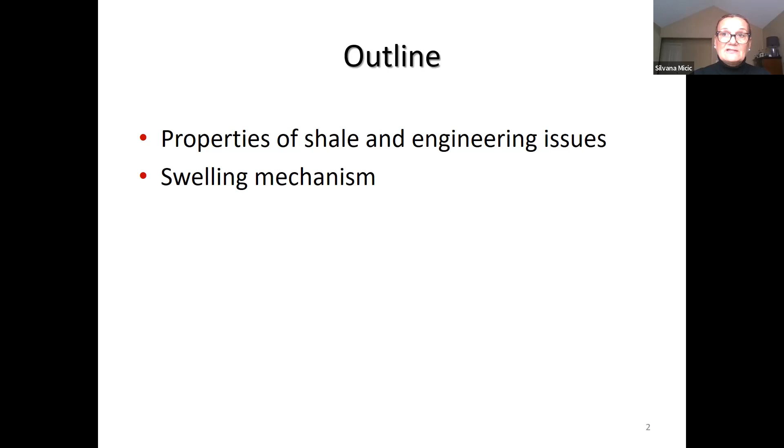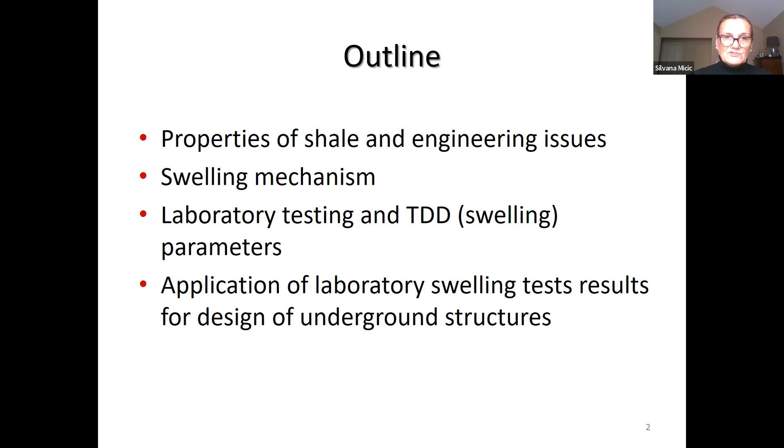So the outline of the presentation today: I will talk about properties of shale and engineering issues faced during the design and construction of underground structures in this rock formation. I will talk about swelling mechanism, explain why the shale swells. I will talk about laboratory testing and time-dependent deformation, which is the swelling parameters obtained from this laboratory testing, and then how these results can be applied for the design of underground structures. At the end, I will talk about one case history, the Billy Bishop Pedestrian Tunnel in Toronto, which connects the mainland and Billy Bishop Airport on the Toronto Island.

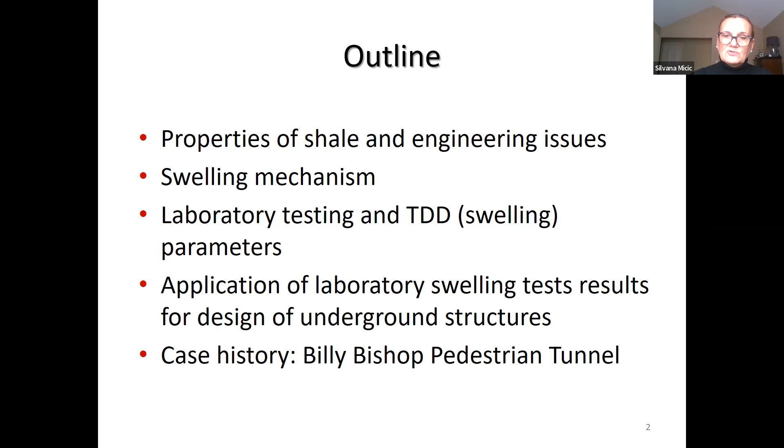So you guys are probably familiar with the geology of Ontario. We know that Canada is geologically one of the oldest countries in the world, and half of its territory is actually exposed Precambrian igneous and metamorphic rocks, which are 4 billion years old. In Southern Ontario, we actually have an unexposed Canadian Shield, where the Ordovician sedimentary rock, 500 million years old, sits on top of this Precambrian igneous rock. That Ordovician sedimentary rock consists of shale, dolostone, limestone, and sandstone.

Shale represents the accumulation of marine mud. This figure shows the geology profile in the Toronto area. You can see that in the Toronto area there is a Georgian Bay Shale, which is at the surface, and most underground structures in Toronto are placed in this Georgian Bay Shale. In the Niagara area, it's the Queenston Shale.

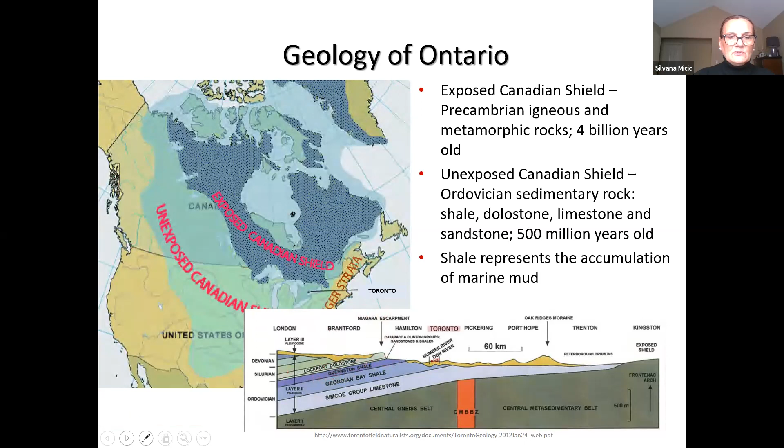The properties of these shales are that they are generally massive sedimentary rock with sub-horizontal bedding planes and relatively widely spaced or no vertical joints, and occasionally there are rubble zones at the weathered rock level. Usually the surface of this rock is very weathered. This rock is interbedded with layers of limestone and sandstone, and sometimes there are clay seams in upper levels.

This rock has locked-in very high in situ horizontal stresses. K0 could be 4 or even greater. This is relatively weak rock with brittle failure in unconfined compression. The rock has very low tensile strength, less than 10%. This rock is also characterized by high fissility and is susceptible to slaking and disking along the bedding planes upon exposure.

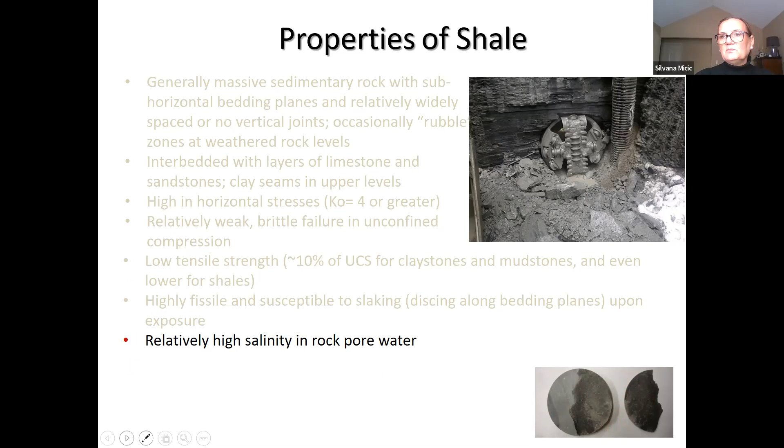In this photo, you can see the disking along the bedding planes. The rock also has relatively high salinity in the rock pore water. This is important later on—I will explain why it is important from the point of view of the swelling mechanism.

And the major characteristic of this rock is time-dependent deformation behavior upon relief of initial stresses. So when we excavate a tunnel or any structure in this rock, this time-dependent deformation behavior starts at the opening. Usually the vertical swelling potential is higher than horizontal, and the other characteristic is that this time-dependent deformation is highly stress-dependent. Later on, I will explain why these characteristics are important for the development of the methodology of investigation and design in this rock.

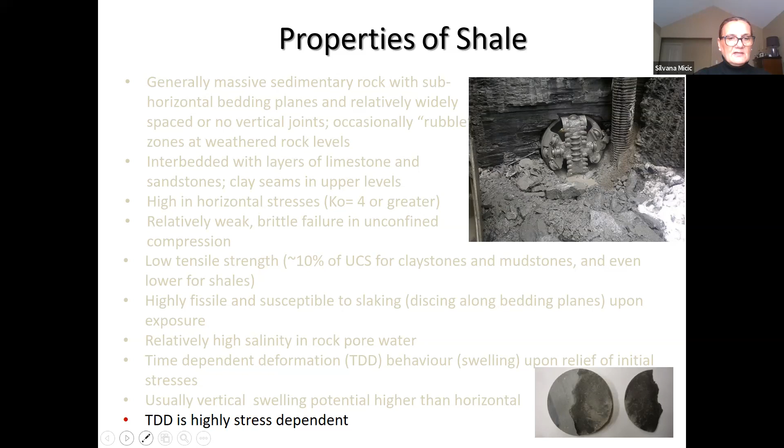These photos show Georgian Bay Shale cores recovered from the ground at different depths: 20 meters and 3 meters below the bedrock surface, and 500 meters below the bedrock surface. You see here it's a massive sedimentary rock with limestone interbeds. This is from the top, close to the bedrock surface, where usually this rock is weathered and some clay seams could be found. This core from greater depth usually is also solid initially, but when you bring it up to the surface, it just starts disking like this and behaves like this.

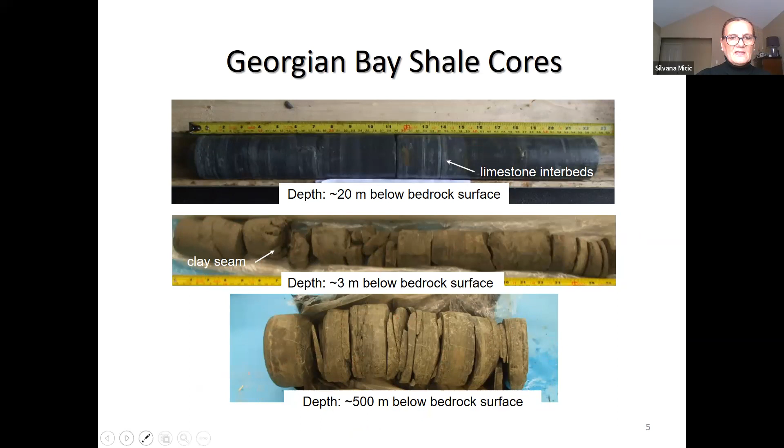So what is the problem here? What are engineering issues on excavation in this shale? It depends on the type of structure, could be open excavation or could be tunnels. It should be a short-term engineering issue during construction or a long-term issue during the use of the structure.

During construction in open excavation, we can see heave and buckling of the floor, and also movement along bedding planes. In the long term, beside these two movements, we can see long-term deformation in unsupported excavation, or stress increases in structure elements, potentially leading to distress. So if we have a wall, a joint adjacent to the rock, we can expect stress increases in the structure element, which can cause distress.

When we're talking about tunnels, tunnels are completely surrounded by rock, and during construction we can see movement along bedding planes at or near the spring line of the tunnel, then local failure at the crown and invert, or some invert heave. In the long term, depending on whether the tunnel is lined or unlined - if it's unlined, we can see displacement increase, invert displacement with time. If there is a liner, then we can see distress of the liner due to stress increase.

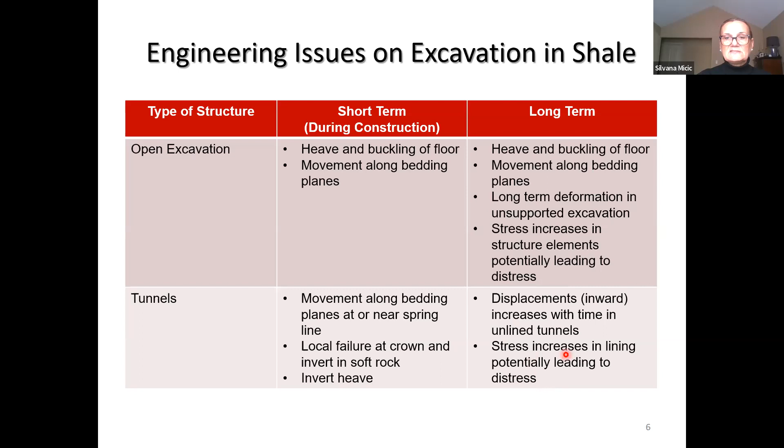So in the following slides, I have a few examples showing these engineering issues. One is heave of the excavation floor. You can see here how big that heave is, in the Dufferin Quarry after excavation.

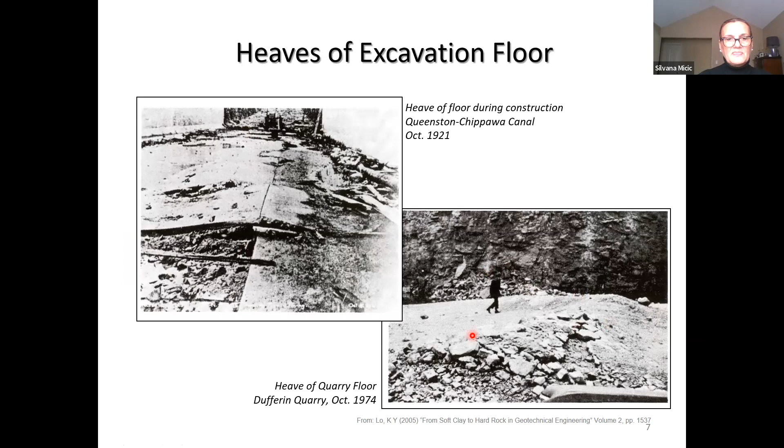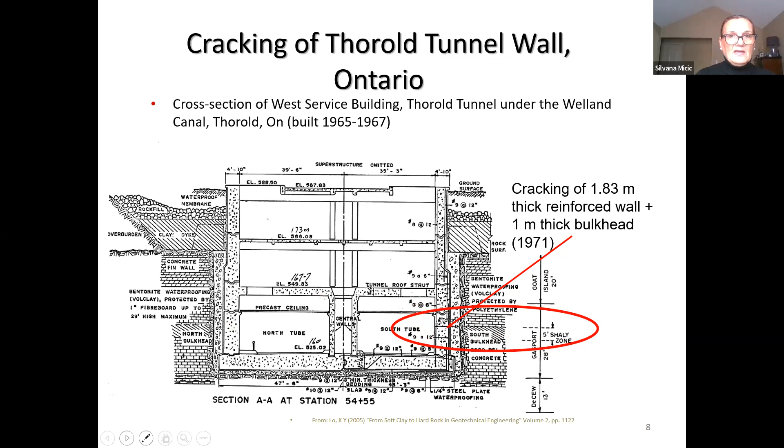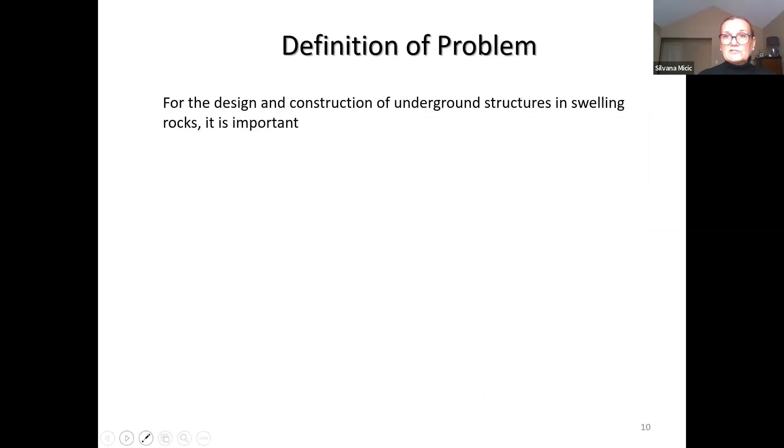So for design and construction of underground structures in swelling rock, it is important to understand initial stresses and time-dependent deformation behavior of the rock mass, and then to develop a stress-strain time relationship for the analysis of rock structure time interaction problem, and also to develop a strategy to address these issues in design. So that's the major thing - to understand this, and then to develop a methodology for how to analyze this rock structure time interaction problem.

Why does this rock swell? That's the question, because usually we know that clay swells if it has montmorillonite or other swelling minerals. As I said before, shale is actually cemented clay or mud, so the major particles are clay particles, but these particles in the Georgian Bay shale and the Queenston shale don't have any swelling minerals - no montmorillonite. So they were puzzled why this rock swells.

The easiest explanation is the process of osmosis and diffusion. When this clay was deposited and the rock formed over long geological time, salty water stayed captured in the pores of this rock, so the pore water in this clay, in this shale, is actually very salty. So when that rock gets in contact with fresh water, we have a process of osmosis - movement of ions from higher concentration to lower concentration, and movement of water molecules from higher to lower concentration.

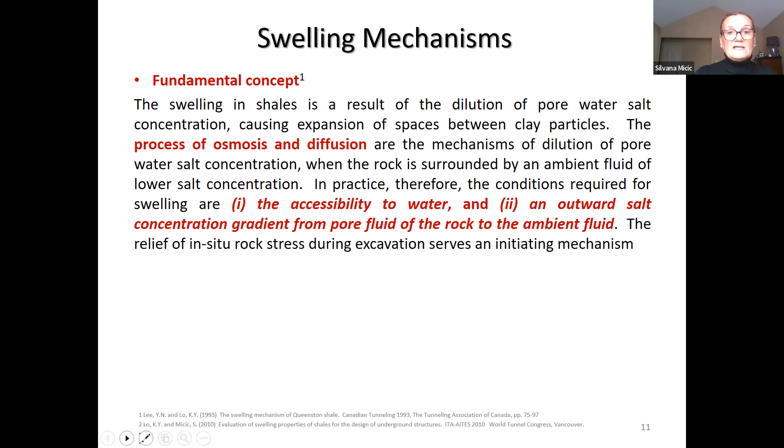On the other side, as I said, the shale is formed by cementing of clay particles, so from the soil it becomes weak rock. These clay particles are cemented with some cementing agent. Queenston Shale and Georgian Bay are cemented with calcium carbonates.

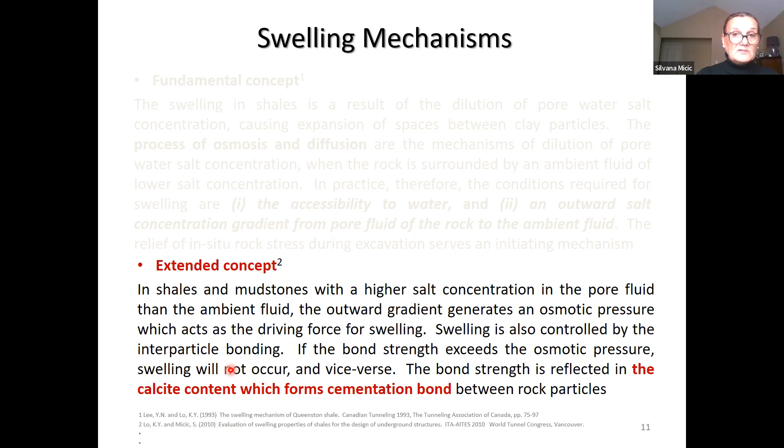If this interparticle bond is very strong, there is no swelling. But if it is weak, then this osmotic pressure is higher and we have swelling. So it's important to see what the calcite content is in that particular rock, which forms that cementing bond.

A methodology for investigation and testing of swelling properties of shales and shale formations was developed in the 70s after that problem in the Thorold tunnel. It was developed by Dr. K.Y. Lo from Western University, and since then this methodology has been adopted by industry and is used for design of underground structures in Canada and around the world.

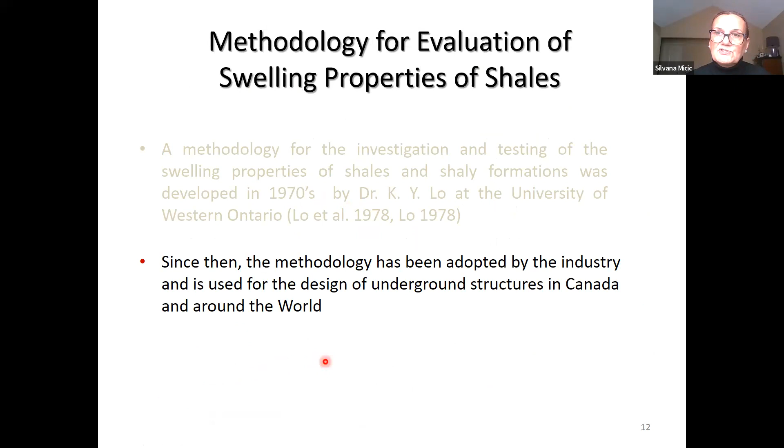If you work in Ontario, you are probably in Toronto. Tomorrow, as a geotechnical engineer, you will probably be involved in some underground structures, and if those structures are placed in these shales, you have to apply this methodology. It's almost become standard in this area.

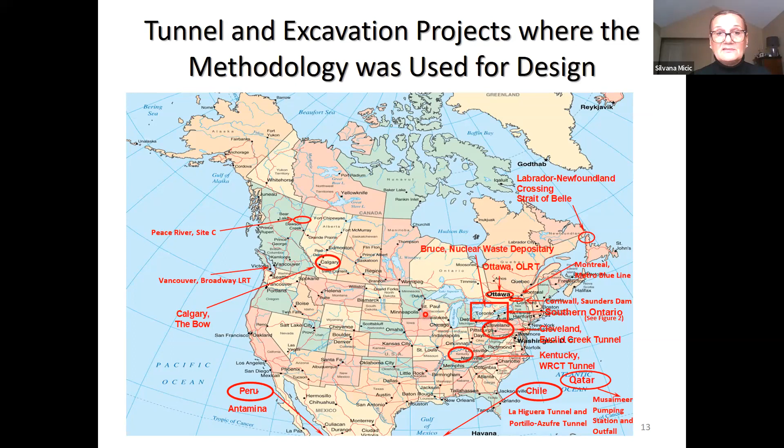This methodology includes two steps: site investigation and laboratory test. Site investigation is actually measuring, rock coring, and obtaining rock cores for testing, and also in situ stress measurement at the site. Once we have these rock cores, we do two types of tests: strength and deformation tests, and also swelling tests.

These parameters obtained from the strength tests we use to estimate stability of that excavation and to propose some support if it is required.

The rock cores obtained from the ground are subjected to swelling tests, and then using the parameters obtained from these tests, either using a Lo-Yuen model or Lo-Hefny model, we can predict some behavior of that particular rock at that particular site.

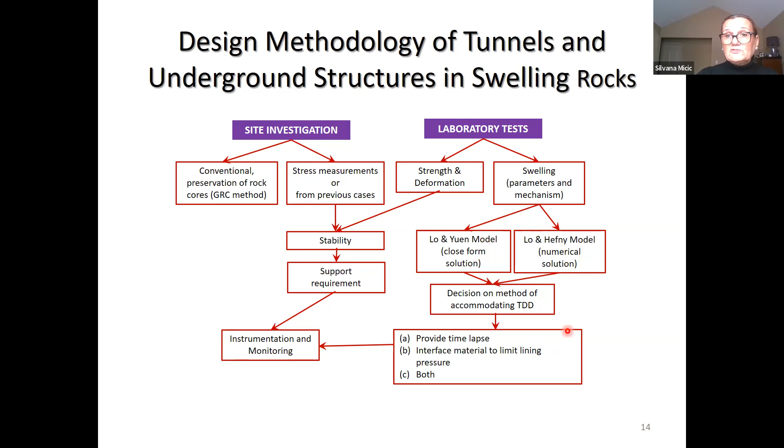Once we have that, we can make some kind of decision on the method of accommodating time-dependent deformation. I'm going to talk in this presentation more about these parameters to obtain, these design models, as well as a method for accommodation of time-dependent deformation.

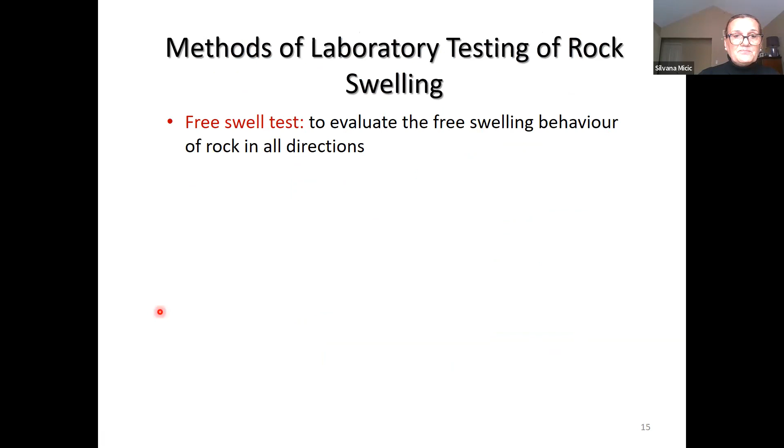The method of laboratory testing of rock swelling includes several tests. One of them is the free swell test, which is designed to evaluate free swelling behavior of rock in all directions. The second test is the semi-confined swell test, to evaluate the stress-dependent swelling behavior of rock, because this swelling behavior is actually stress-dependent.

The third type of swell test is the Null swell test, which is designed to measure the critical pressure required to completely suppress swelling of rock. What does that mean? If you have your structure, a tunnel liner for example, directly on the rock, because the rock swells, it exhibits some critical pressure, putting pressure on your structure, and using this test we try to measure that suppression pressure.

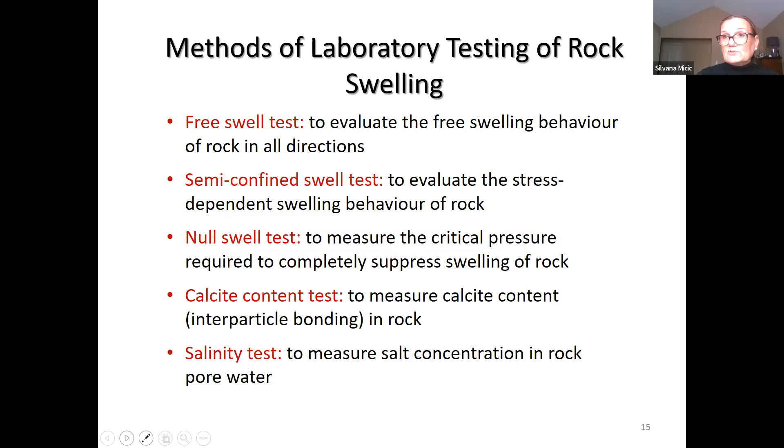Besides that, we of course measure calcite content to explain the mechanism of swelling. If the calcite content is high, probably that rock doesn't swell. We measure a salinity test to measure salt concentration in rock pore water, that's the method test we apply.

Now I'm showing you how we get the samples for these tests. This photo shows, as I said, the rock cores should be cored from the ground using the rig. This is actually the Billy Bishop site when we recovered Georgian Bay Shale for testing for this particular project.

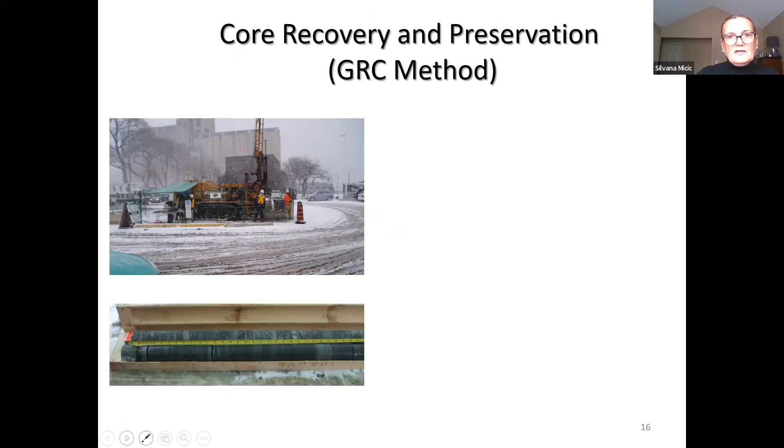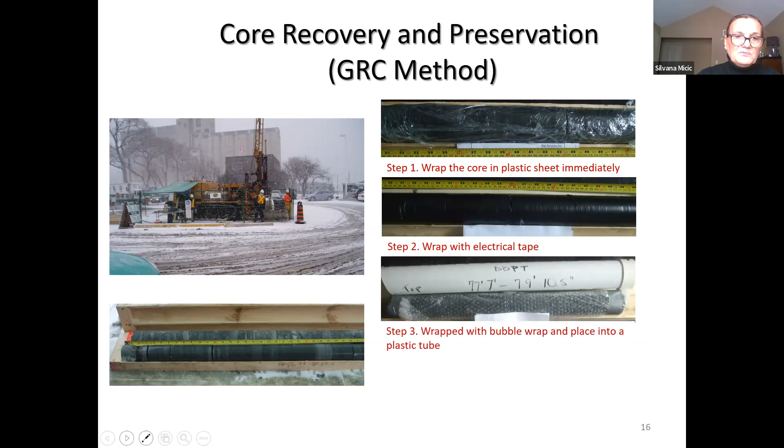What is important for this lab test is that we have very well preserved rock samples. We created some steps on how to preserve it, to be sure that the sample preserves its natural moisture content, so it can be usable for this kind of testing we developed for design of structures in swelling rocks.

So these are the steps, and tomorrow, if you are a geotechnical engineer and you're recovering your samples, you need to preserve them. You need to send the samples for testing, swelling test. You have to follow these steps.

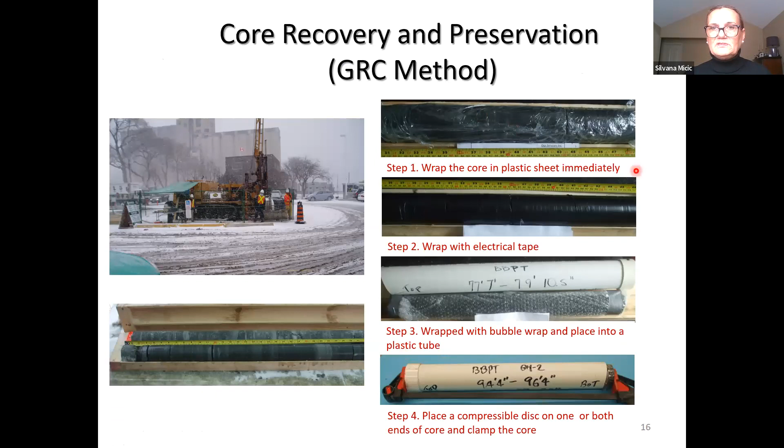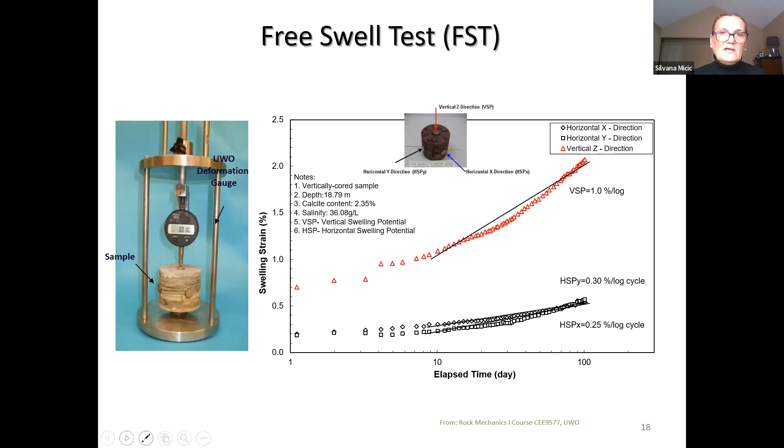The other test is semi-confined swell test, where we also have a sample and we submerge that sample in water, but the sample is stationary, and we put some frame where we apply some load. So we apply some pressure to this sample specimen, and then we monitor swelling strain, changes in strain.

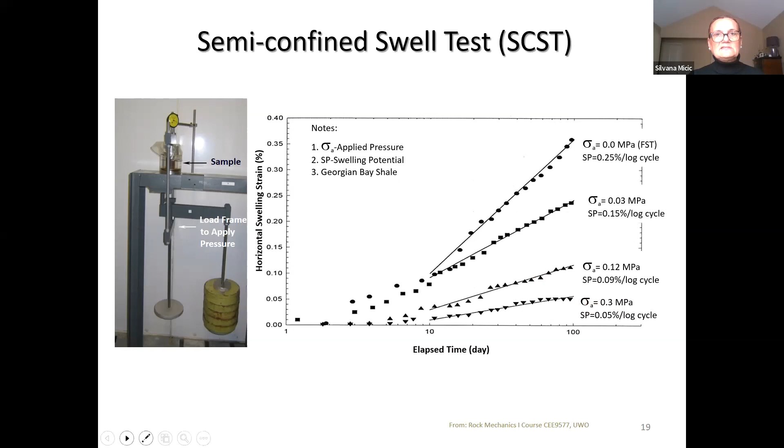What we're doing here, we don't allow the sample to swell. The sample itself tries to swell and to push this, and we capture that push of that force on this load cell. With these gauges, we actually monitor that there is no movement, just the pressure. So the results of this test are presented here.

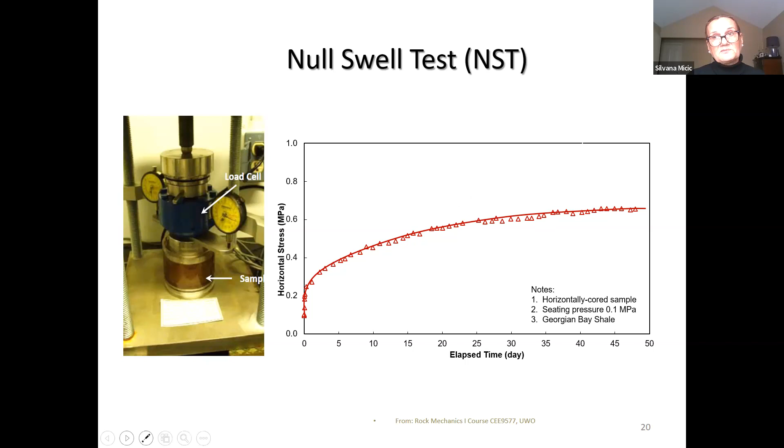So what does that mean? That this rock applies 0.7 megapascal on the structure, which is huge. What does that mean? If you have a tunnel liner, you have to accommodate, you have to design your liner to this, then your liner is going to be very thick, very expensive, so nobody likes that.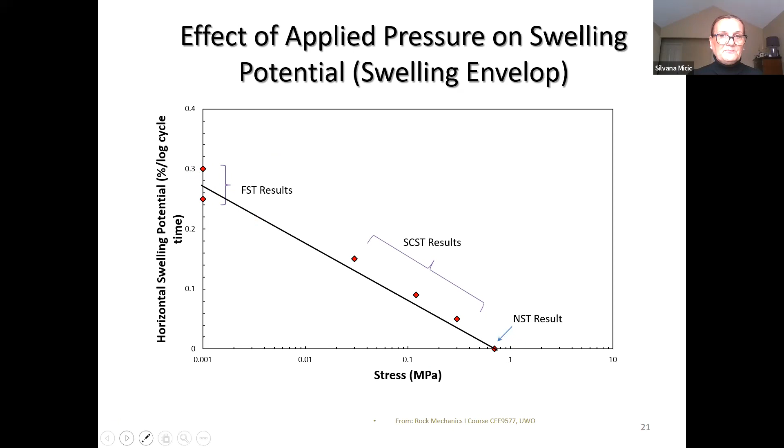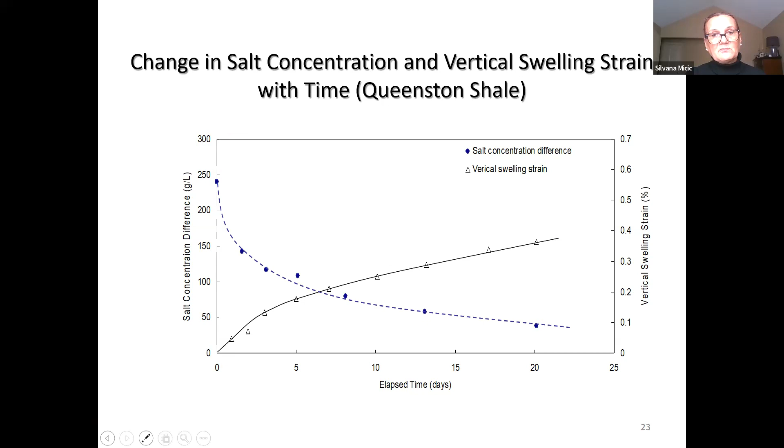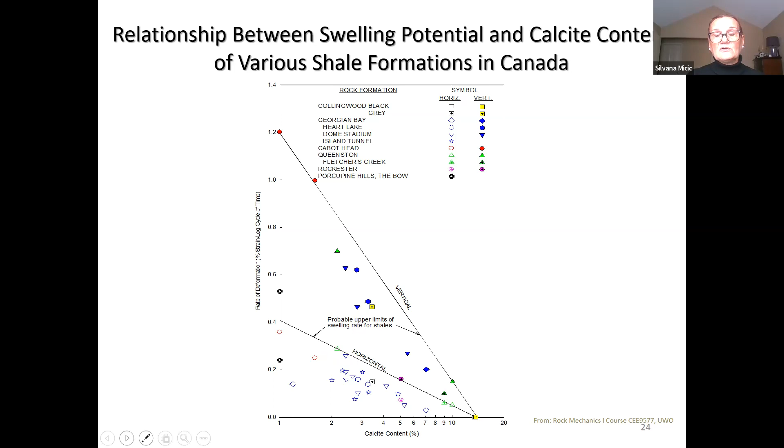Then I also showed in the other slide where I'm showing swelling potential versus calcite content, percentage of calcite content. You can see if the calcite content in this rock is higher than 14%, there is no swelling. So the rock will swell only if that calcite content concentration in that rock is low. This is the balance between osmotic pressure due to high salinity and this concentration of calcite content. That's why we measure these two properties as well on the sample before and after the swell test.

From these tests we have parameters and methods for tunnel design in swelling rock. One method is the Lo and Yuen model, a viscoelastic closed form solution for a concrete lined circular tunnel in swelling rock, developed by Dr. Lo and Yuen in 1981. In this model, the time-dependent rock-structure interaction is characterized as linear viscoelastic behavior using a single Kelvin element, employing time-dependent parameters obtained from the swell test. I will talk about this model more later.

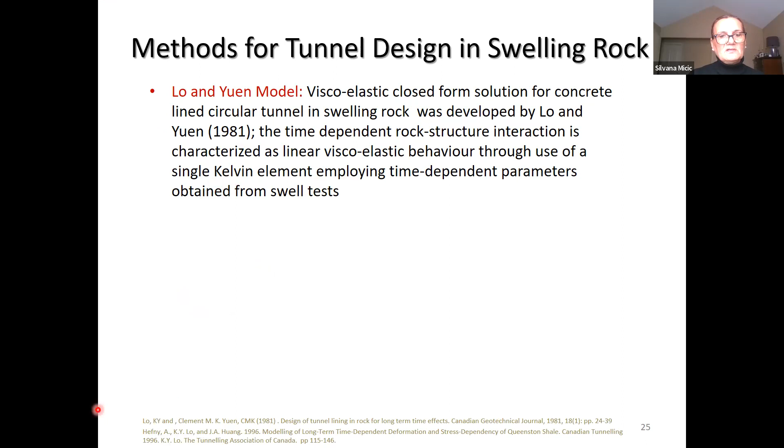The other method is the Lo and Hefny model for numerical analysis. So this one is numerical, while the first is a viscoelastic closed form solution. Predictions with the closed form model could be over-predicted compared to using the Lo and Hefny model for numerical analysis. This model consists of 3 Kelvin units connected in series to model the nonlinear long-term swelling behavior of Queenston Shale.

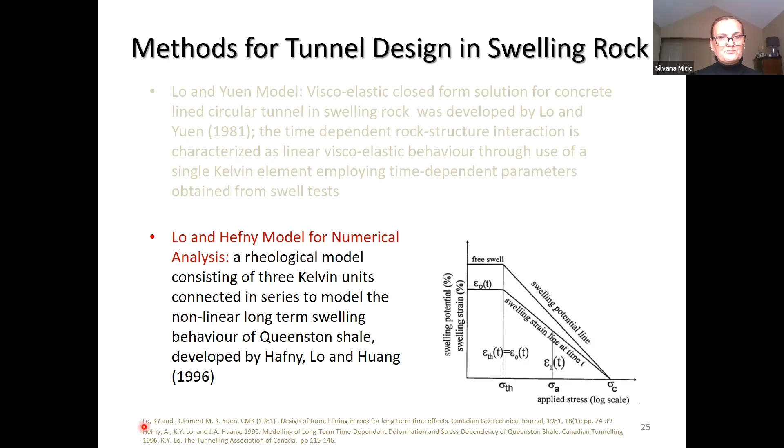So what does that mean? After we finish this laboratory testing, we have to provide parameters which can be used in either the Lo and Yuen model or the Lo and Hefny model.

Kelvin model parameters for the rock-structure time interaction analysis for the Lo and Yuen method could be estimated from semi-confined swell test results. From these results we can get the viscosity of the dashpot in the Kelvin model for rock and the time-dependent modulus of rock, and of course the ratio of these two.

So results from the semi-confined swell test can be used in the Lo and Yuen closed form solution method. For the Lo and Hefny model, swelling rock design parameters for numerical analysis could be obtained from the free swell test and null swell test results, giving swelling potential in horizontal and vertical directions and suppression pressure. To use this for design, it's also necessary to know the in-situ vertical and horizontal stresses in rock, as well as Poisson ratio and elastic modulus of rock.

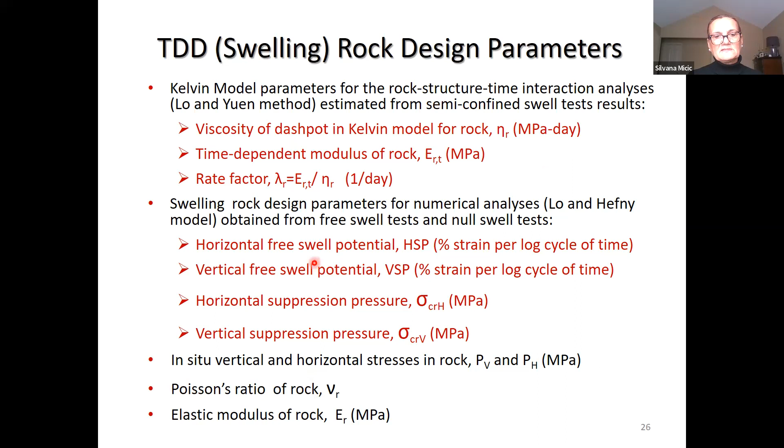For numerical modeling, we can use software such as Flac or Flac3D to analyze the swelling behavior of rock mass, as well as the impact of that swelling on the tunnel lining. We have to have this design envelope, which is the envelope I presented before.

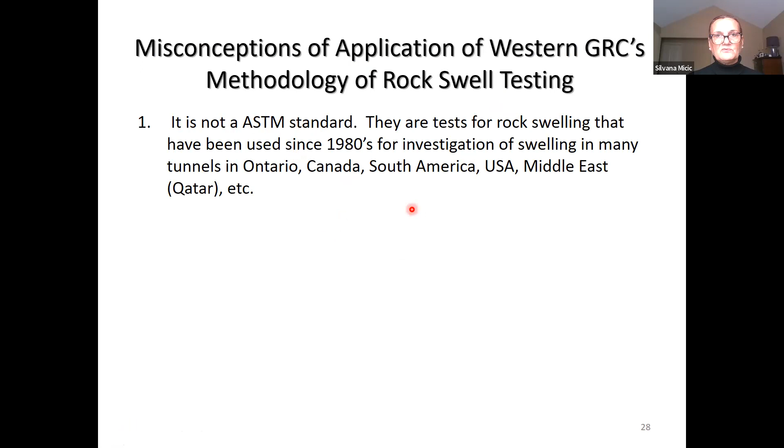The major issue with application of this methodology is that there are some misconceptions, and I want to explain that it is not an ASTM standard. These are tests for rock swelling that have been used since the 80s for investigation of swelling in many tunnels in Ontario, Canada, and other parts of the world.

So it is not an ASTM standard. There are some ASTM standards which deal with swelling behavior, like D4546, but that is for soil, not rock, or C1585, which is for concrete and is short-term testing, 10 days. Both of these ASTM standards are not applicable to rock formations in Southern Ontario because the swelling is a long-term process. So if someone asks you to apply these standards to swelling rock, that's wrong. These standards are not applicable.

Also, interpretation of results: as I said, we have to use the second log cycle to interpret the slope of the line, not the first and second. We actually discard the first data, from day 1 to day 10, because the specimen needs to adapt to the new lab environment.

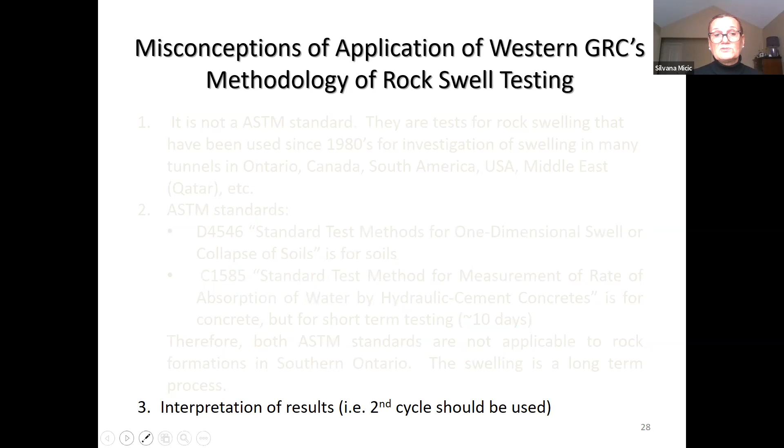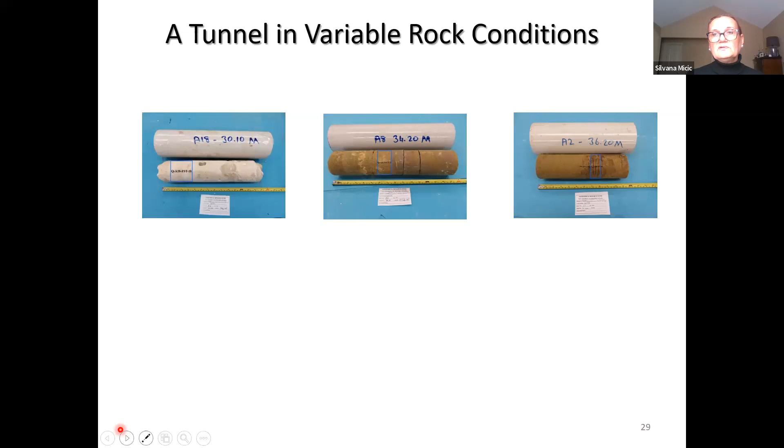Another question you might face as a tunnel designer is what happens if your tunnel goes through different rocks. For example, this is one tunnel in Qatar, which goes through 3 different rock types, and you see the swelling behavior is different in each of them. So the question is, which of these parameters will you use for your design? Are you going to design your tunnel to accommodate this swelling or that one? That's something you as an engineer have to answer.

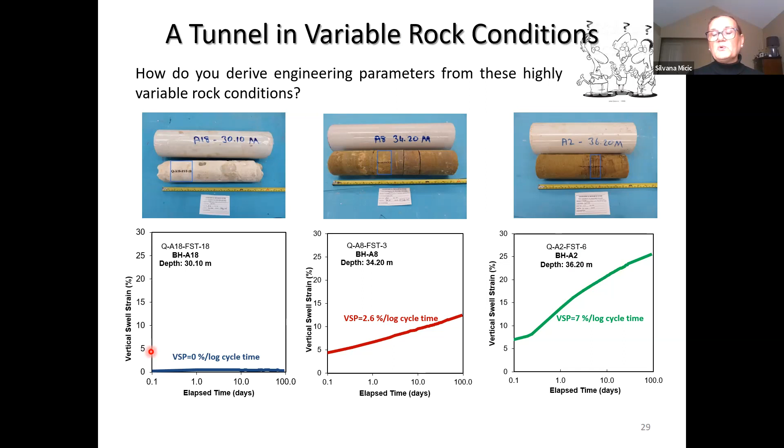So it's very important, when you get a project like this, that you develop a good testing program for your rock. The scope of the swelling test program depends, of course, on the type of structure - is it a tunnel, is it a shaft, whatever it is - then the depth of the structure and the stage of the project.

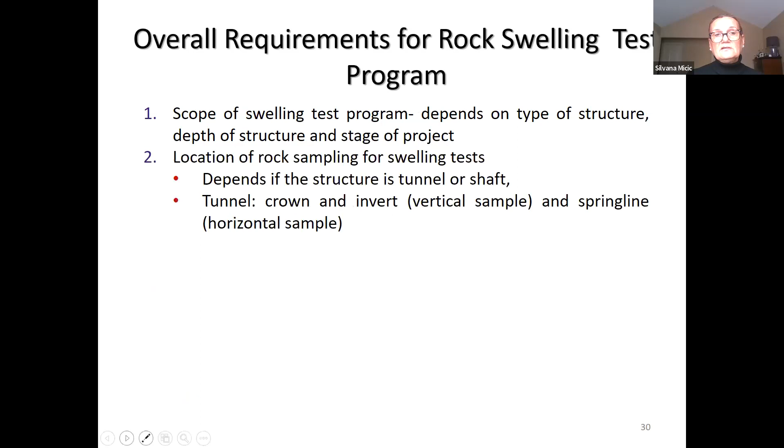Then location of rock sampling for the swelling test depends on whether the structure is a tunnel or a shaft. If you have a tunnel, then you have to do sampling and testing of the rock at the crown and invert.

These are vertical samples, and also at the spring line, these are horizontal samples. Then what kind of test you have to make a decision: free swell test, do you need semi-confined null swell test, horizontal design envelope or vertical design envelope?

That's another point you have to think about when preparing a testing program for your rock. How many tests will we run? That's the question. And where to test, from how many boreholes, at what depth?

All of this depends on heterogeneity of the rock at the site. If you have homogeneous rock, you need fewer tests than if you have heterogeneous rock like that one in Qatar. But at the end, a sufficient number of tests have to be performed. And I was talking about the importance of rock quality - we need good quality rock to be tested.

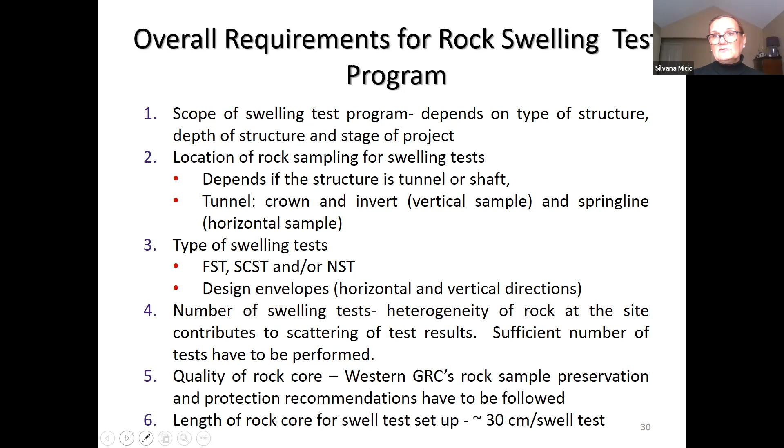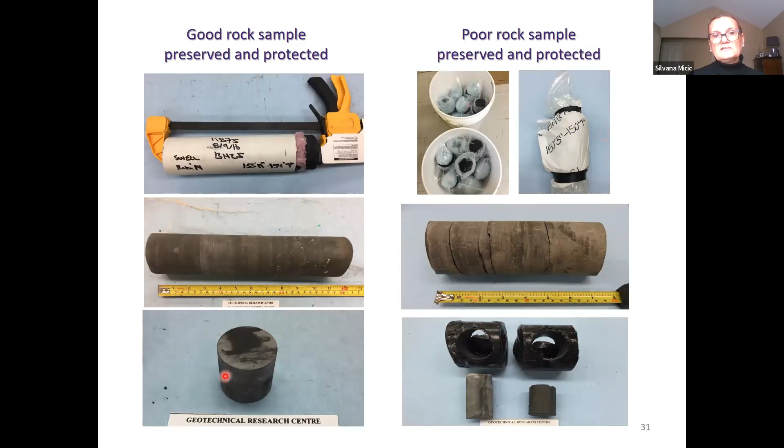For each of these tests, we need at least 30 centimeters of rock. So this is the good rock, and this is the bad, poor rock sample - you can see the difference, as shown here.

Once you find out your rock's behavior and design your structure, you can simply apply the pressure you found, or if that swelling pressure is very high, there are several methods of accommodating time-dependent deformation.

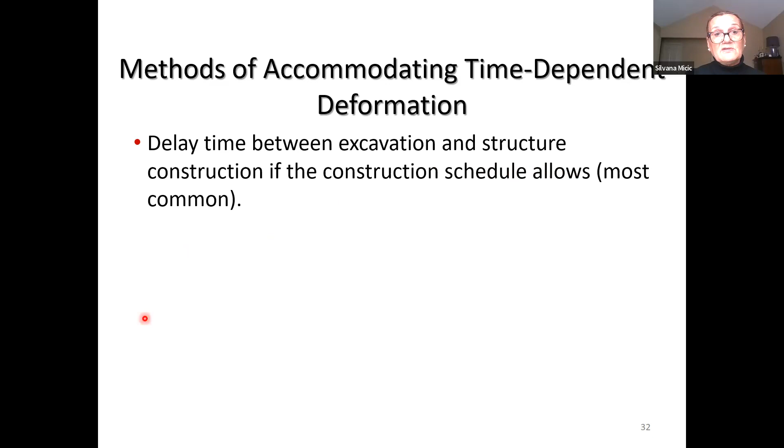One is to delay time between excavation and structure construction - this is the most common method, but the problem is that the construction schedule usually doesn't allow it, because they try to put the liner right away after excavation. The other method is maybe to install some compressible layer between the structure and surrounding rock.

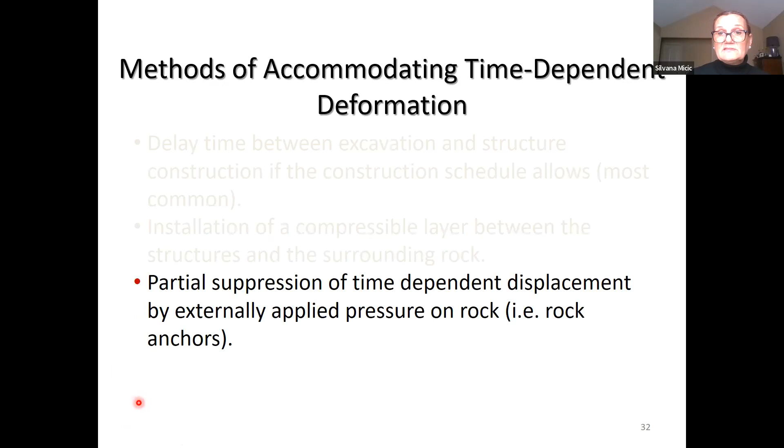Between the rock and the concrete liner, you can put some compressible material like foam, styrofoam or something like that. And then it could be partially suppressed by external pressure using some rock anchors.

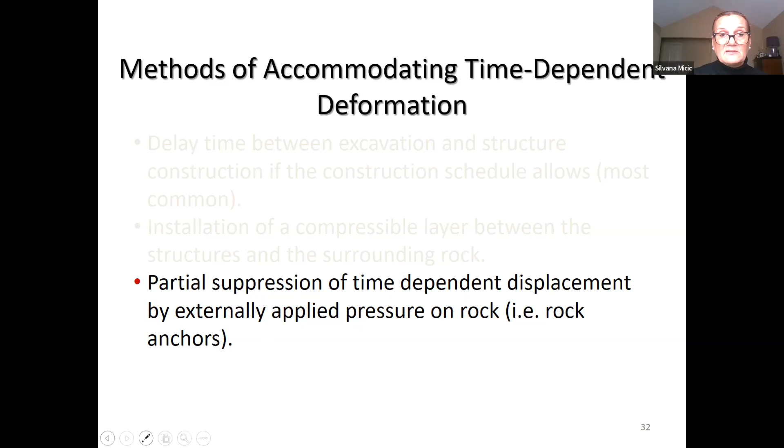That's the situation in the semi-confined swell test. If you apply some pressure on rock, you decrease the swelling behavior, and you can create a stress relief between the structure and surrounding rock in specific cases - just make a gap between the rock and structure, allowing change in volume of rock, or use a combination of all of these.

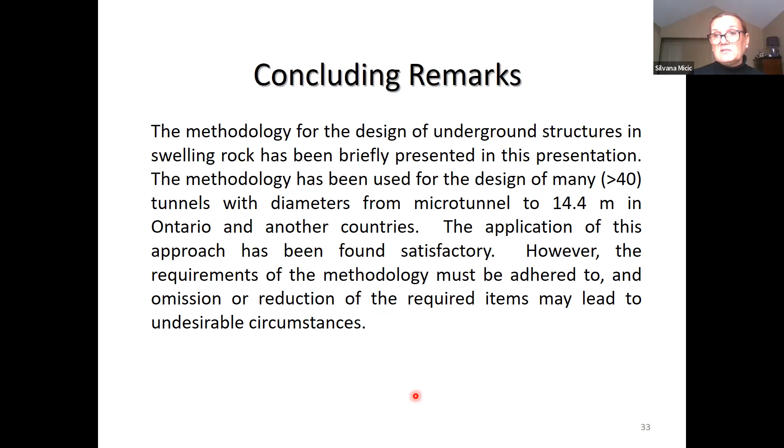Before this tunnel, which was put into function in 2012, a ferry boat was used to transfer passengers from the mainland to the airport building. But then this tunnel was built.

The major issue for designing and building this tunnel was that there is a small cover above the crown of this tunnel. The tunnel was placed in Georgian Bay Shale, which is swelling rock, and this was the biggest tunnel ever built in Georgian Bay Shale. We also didn't know what was happening there, because any drilling or investigation in this channel wasn't allowed.

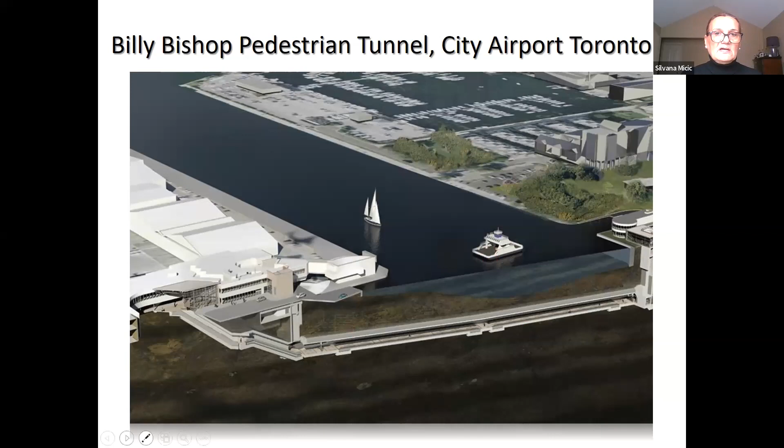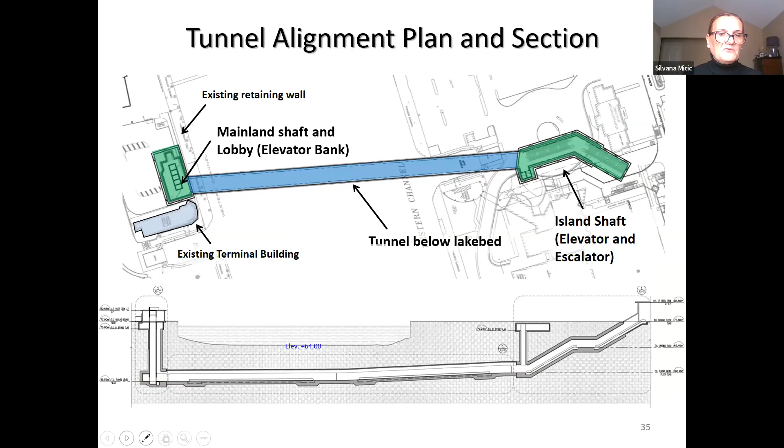So the tunnel is 180 meters long. This is the mainland shaft, this is the island shaft - the mainland shaft is 35 meters deep, the island shaft is 30 meters deep, and the tunnel diameter was 12.5 meters.

First this tunnel was excavated using a 1.8 meter diameter rock TBM, and then it was filled with concrete. Then they drilled the next one, and all of them were filled with concrete. These drift tunnels actually created the umbrella or arch structure.

This helped prevent any collapse from the top, because as I said, the cover above this tunnel was less than 10 meters, and usually it has to be 2D - the tunnel is 12.5 meters. So after they finish this arch, they excavate the tunnel itself.

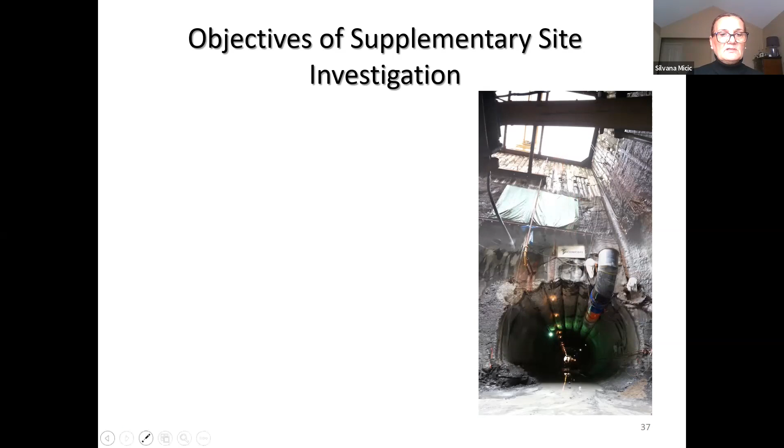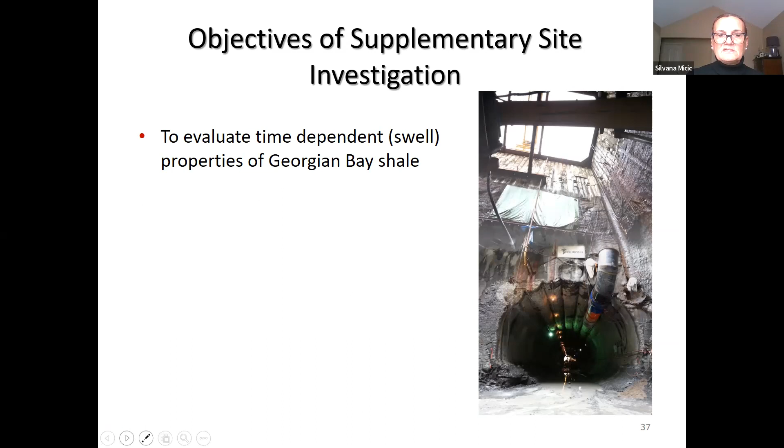When we got this job, there was a GBR already done, based on available investigation, but none of these swelling tests were done, or in situ stress measurement. So supplementary site investigation was performed, which evaluated time-dependent properties of Georgian Bay shale, evaluated horizontal in situ stresses, and verified subsurface geotechnical characteristics specified in the geotechnical baseline report.

The baseline report gives some parameters, but we use this supplementary site investigation to verify it, and also to verify design approach and provisions made.

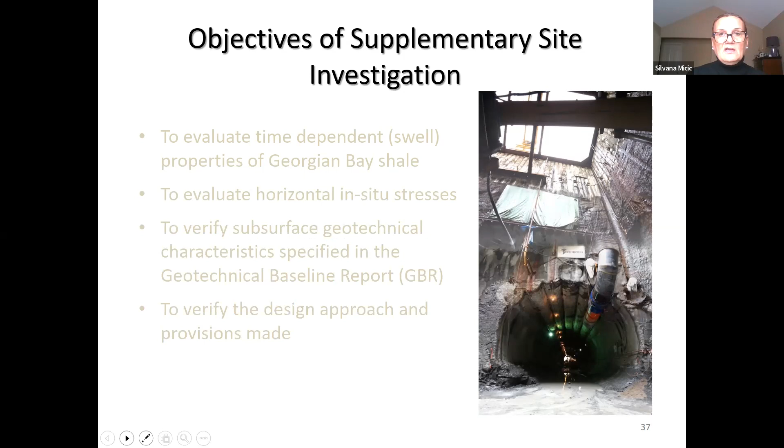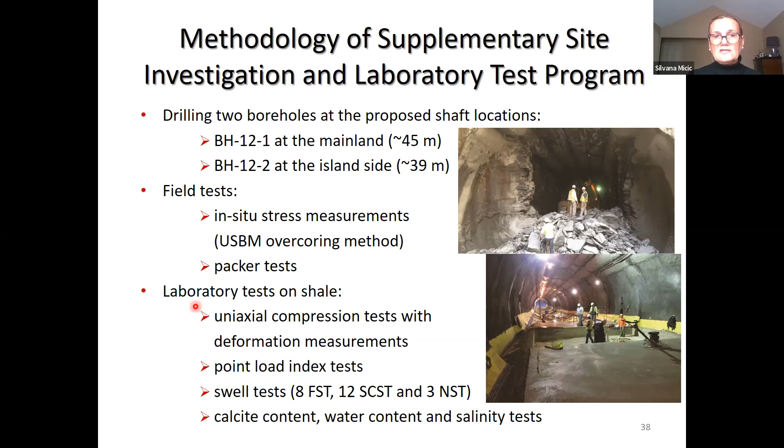So 2 boreholes were drilled, one on the mainland and another on the island. Following that methodology I explained, the field tests included in situ stress measurement and also Packer test for hydraulic permeability of the rock, and also all of the laboratory tests I mentioned before. So one borehole was drilled here, another one on the island, no boreholes in between. We weren't allowed, because we weren't allowed to disturb traffic in this channel.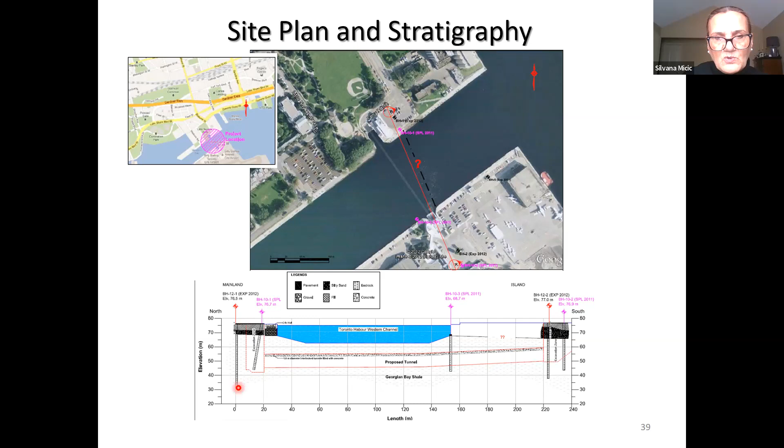So this is the stratigraphy with these boreholes. The tunnel was placed in Georgian Bay shale. This is that Georgian Bay shale. These are the samples recovered from these boreholes, just as an example.

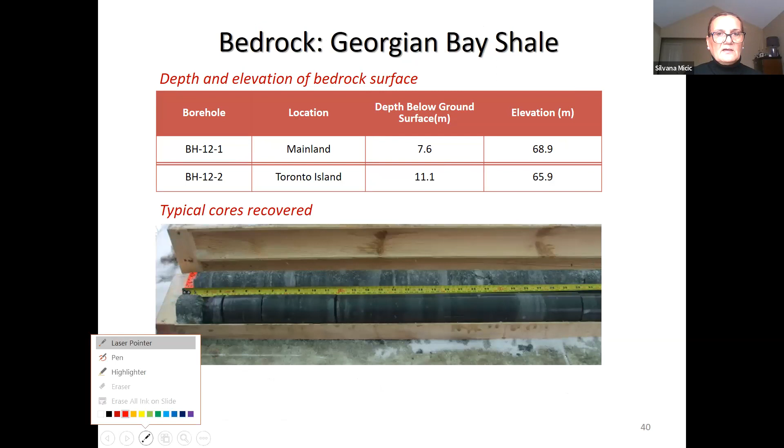As I said, we did in situ... Sorry to interrupt. Just a note that the students—we should probably wrap up the presentation in 2 or so minutes, just so they have time.

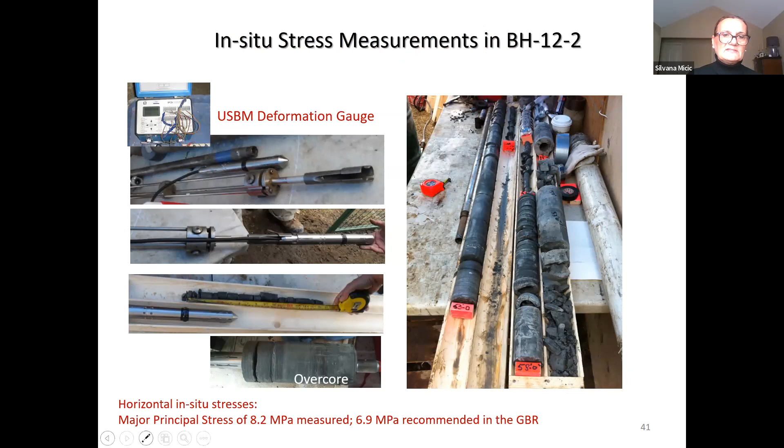Okay, so we did in situ stress measurement, and we did strength properties, and also a summary of swell. We did a swell test where we measured the swelling potential, vertical and horizontal.

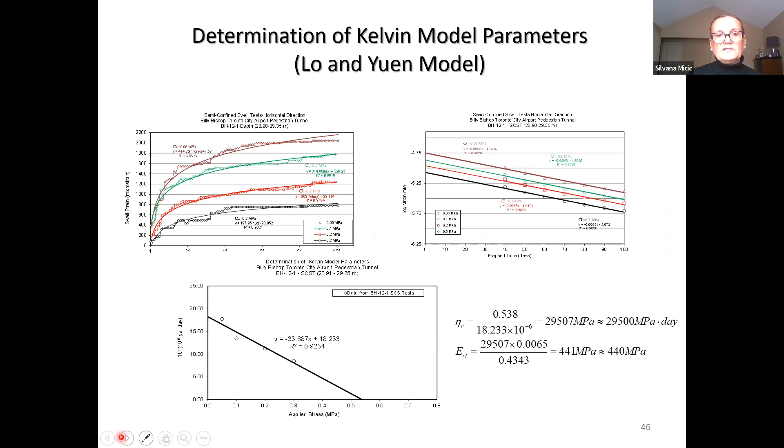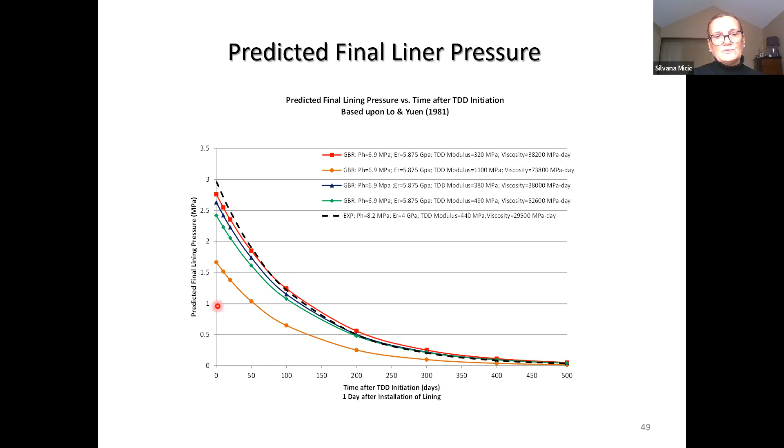So these are the parameters provided, and then this is the final outcome. The tunnel was built, and also these shafts.

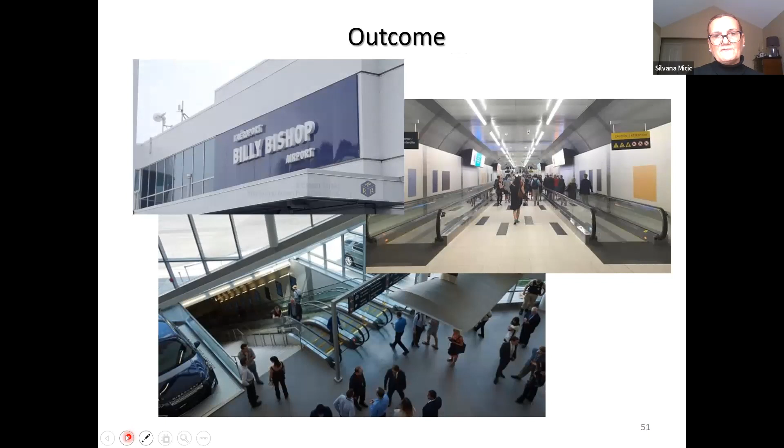For this project, since this tunnel will be placed in Georgian Bay shale, a laboratory swell test program is proposed, and it's going to be carried out in this GRC lab. So I just want to say that I'm looking for an M.Eng student who is interested to work on this project. If anybody is interested, can contact me by email, or you can ask Professor Bing for my contact.

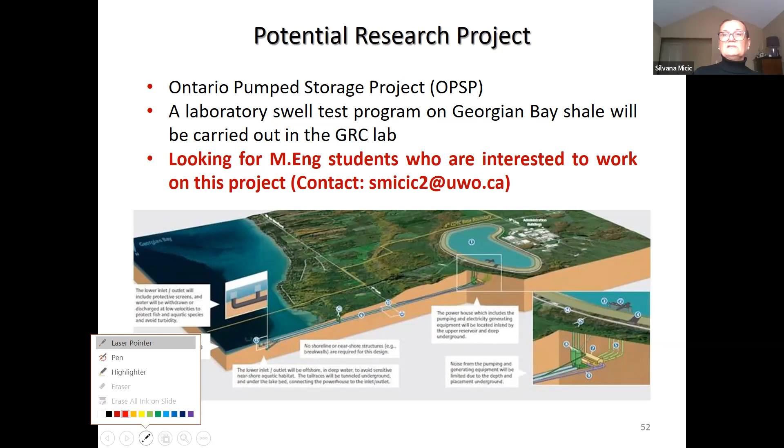And so that's all I have today for you. So if you guys have any questions, I'm happy to answer those questions.

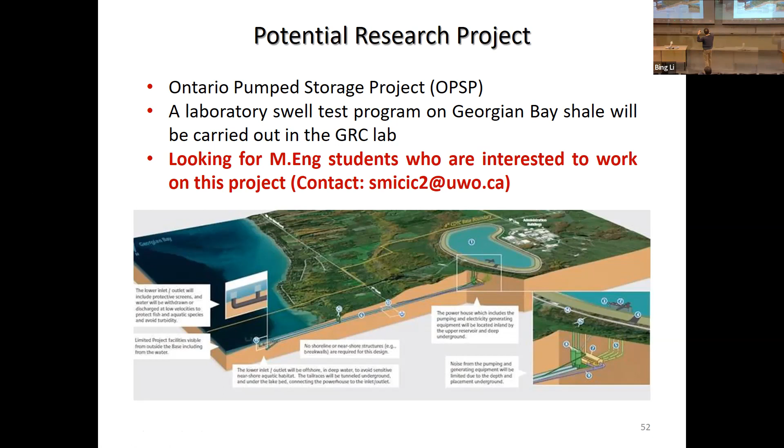I just have one curious one. You showed the Niagara tunnel photo, and I actually used that example for the rock mechanics class as well. But I was curious, because you say that typically the swelling is most severe on the vertical, but in that photo of the Niagara tunnel, it looked like it was sort of potentially even off angle from the crown that was swelling.

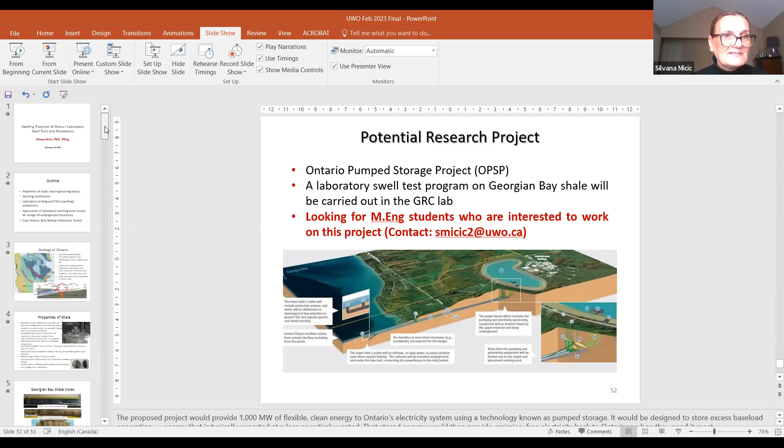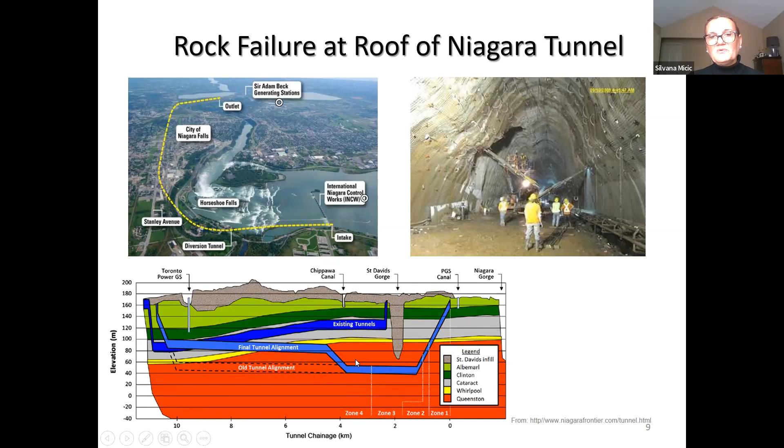I see, because swelling is time dependent—you need time to develop. This is immediately after the TBM passed. After several days, this happened. I was in the tunnel at that time, and they had a lot of issues. That's why they decided to run away from this Queenston Shale.